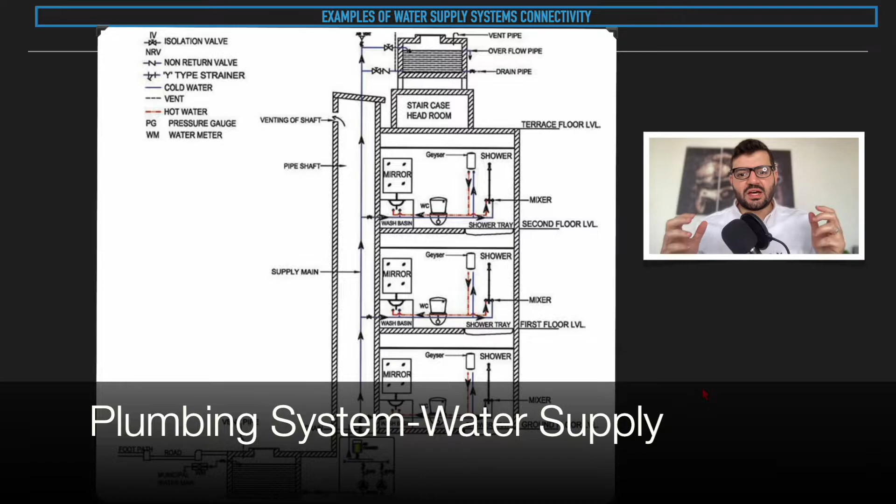Welcome back to another lecture. Now, this is where we get into the details, where we have the realistic application and the things that you can see in real life that will paint the picture for you based on what we have learned up to this current point. In front of us right now, we are going to have an example of a water supply system connectivity.

We do have a very basic structure, which is a two-story level house, let's say, or a small building, where we have the ground floor, then you have the first floor, then you have the second floor, and you have the terrace, and they go to the rooftop.

We're going to walk through the various components for water supply only, how the fixtures that we have seen within this current zone or locations are connected together based on what we have learned up to this current point, in terms of the connectivity, the components, how they have been assembled to deliver the required outcome, which is a functioning water supply system.

Now, let's start off with the space. Now, let's consider this current space right here, okay, which is typical to this space and this space. Normally, in real life projects, you do have typical spaces, which makes life easier for you as a designer, where you can get to design one space and just simply replicate that design for other spaces, especially if you have commercial buildings or residential buildings. If you have similar apartments, the layout is exactly the same. You can properly design and focus your design skills on one apartment, get everything right, and just simply replicate for the entire building, which is straightforward in that sense.

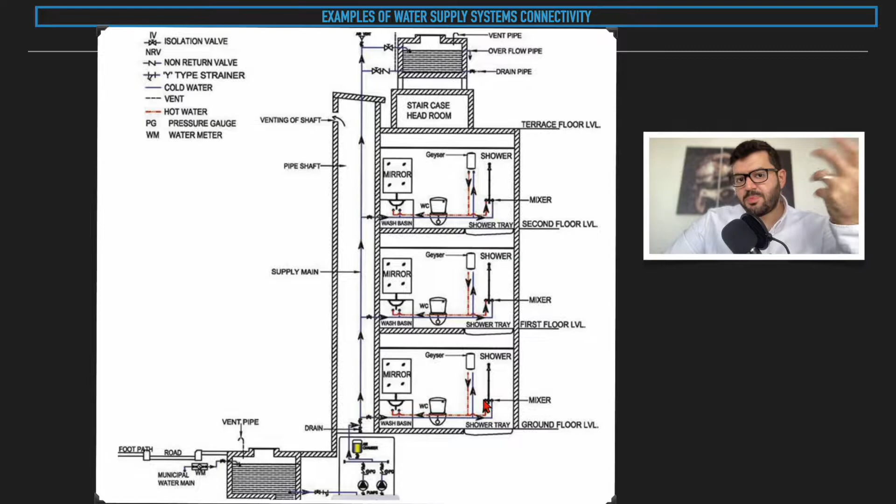Now, these PPR pipes are going to be cut down to certain lengths. Now we're going to be adding fittings, for example T connections. Let's say if we connect a pipe from this side and this side, then we have another pipe that way that will lead to the shower, that will lead to the water heater. We can add some flexible piping connections for the endpoints. This is a bit advanced, but for later time.

Now we combine the pipings with the fittings. How about adding some valves, right here? The first thing that came to mind is having a valve. Why? Because if I want to control the flow into the space completely, think about this space as one big pocket, and you're going to gush water inside that pocket. But you need to control that flow at any point in time, in case if you have a leak or something goes wrong, you need to maintain the fixtures.

You will close the valve. This is where we have a valve, and you can see on all floors this is a valve and another valve and another valve. It could be a globe valve, it could be a butterfly valve, but preferably for these basic applications you go for a globe valve, just to have a proper shut off for the entire space.

So we will have a valve which is going to control the flow going into the space, the water supply. Then this main line is going to feed this fixture with cold water, the WC, the water heater, and the shower. Then the water heater is going to feed the fixtures that need hot water with the hot water supply line. So you can see we have hot water, cold water, hot water, cold water.

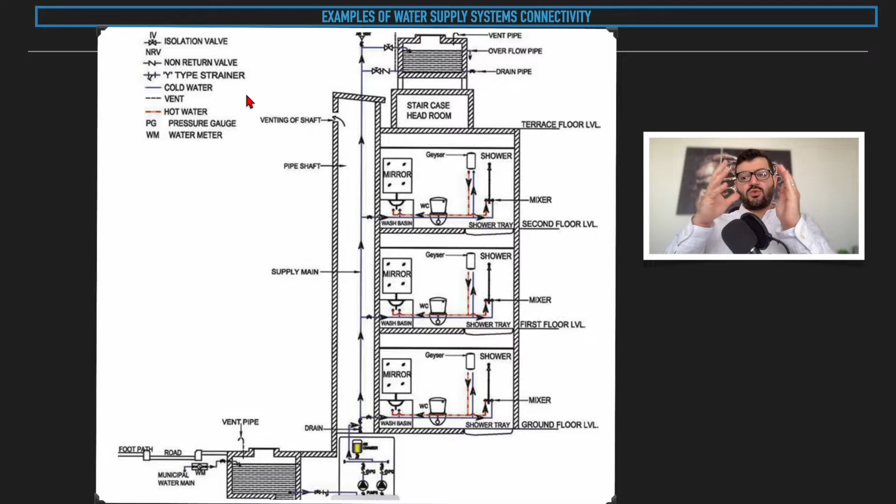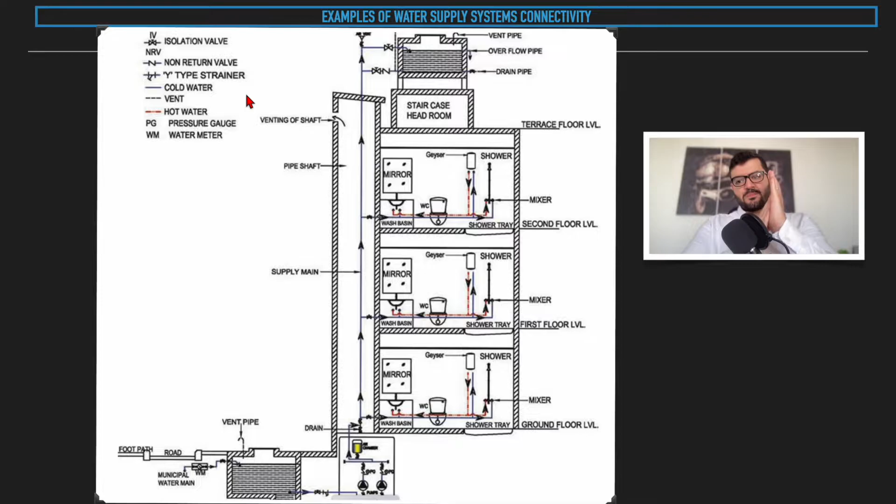When we need to connect a piece of equipment like a pump, we need to make sure there are no contaminations or solid pieces that might get inside the pump and break it. So what we do is use what we call a strainer, like a filter. We put it in the middle of the line as the flow goes in. If there's any solid part, like a piece of paper or a plastic bag, it doesn't pass through into the pump and break it. It gets stuck at the strainer. Then we can take the strainer out, simply clean it, and put it back into the piping network.

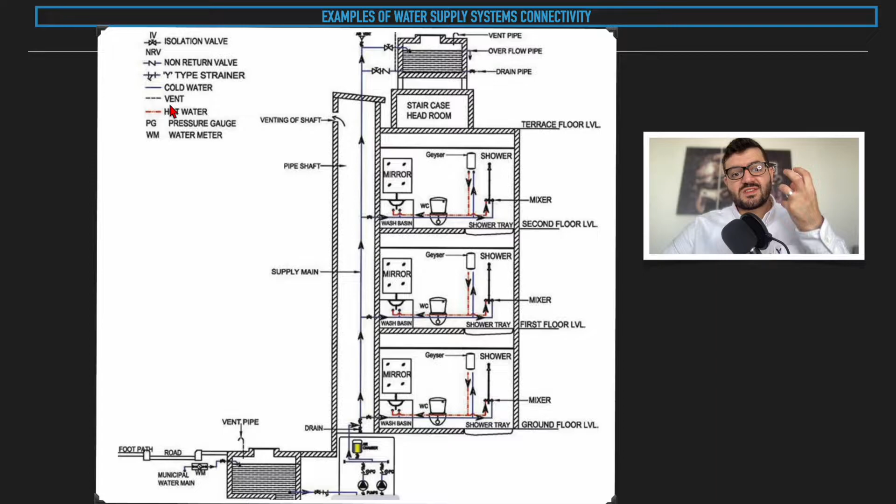Now, the blue line is for the cold water, and the dashed line is for the vent. I'm going to tell you what a vent is. A vent is simply for the discharge of air or odor into the surroundings, because the plumbing drainage system has smelly features, so you have to discharge that smell somewhere outdoors.

At the same time, you have to make sure the pressure inside the system is controlled. You don't want an overly pressurized or under pressurized system. Think about it this way: if you have a small bottle and keep adding fluid inside, the level will go up, and eventually the bottle will burst. The bottle in this case is the piping network. So what you do is have some vents such that once you add pressure, you're able to vent that pressure from your system.

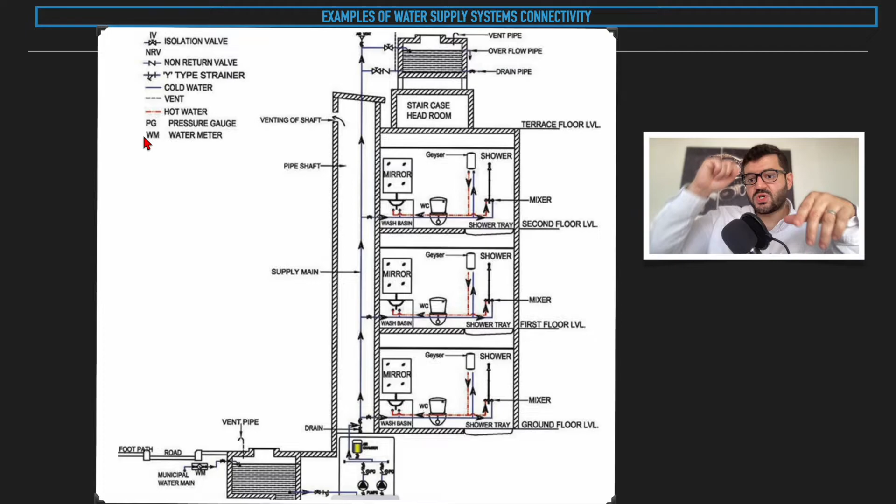Now the red line is going to be the hot water. PG, often you're going to see this, a pressure gauge. The same way you have a thermometer to measure temperature, we need to measure the pressure of the system. In the piping network, we have a pressure gauge, like a needle. You simply insert this needle inside the piping network and it shows you how many bars you have.

It's very useful for measuring the pressure before and after a pump. Once we select a pump based on certain requirements for pressure, head, and flow rate, I need to make sure my pump is delivering as per my expectations. So I'm going to get a pressure gauge and put it at the inlet and at the outlet of the pump to see the pressure difference.

Now, WM is water meter. If you're living in a country with a monitored watering system, this water meter calibrates how many gallons of water you've been consuming per month, and it's basically at the entrance of the facility or building. For example, right here, this is the municipality main water line from the government, and it goes into the water meter, which is going to be held. It shows you how much water has been contained in this current tank that will be used by the entire building.

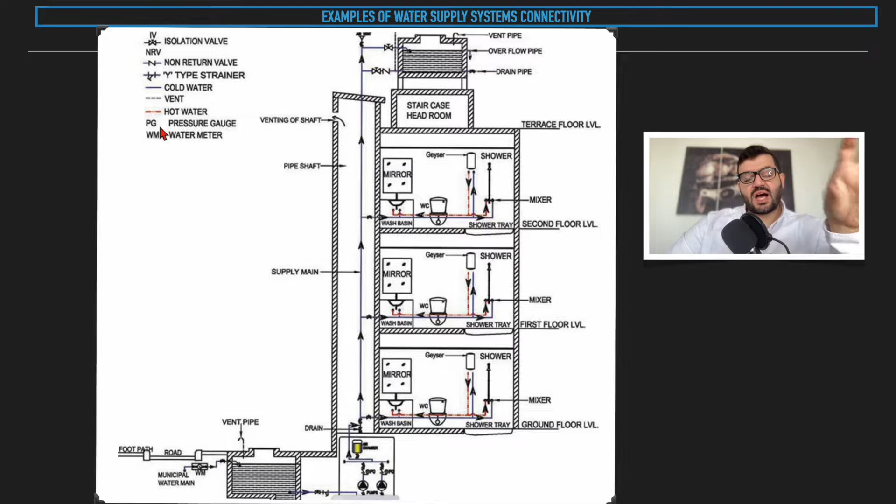So now you have a lot of information, so make sure you can simply pause and replay to have a better grasp of the concepts. That being said, the legend is very important because it shows you what you're looking at, what these components are, so you have an idea what every symbol means. So before attempting to deal with a drawing or a schematic, take a look at the legend, see what components you're looking at, and apply what you're seeing to the schematic you have.

Now let's get back to our sketch, to the drawing. We do have this current space. We said the blue line is the cold water, the red line is the hot water. We have the symbol for the isolation valve, one valve, two valves, right? If you take a look, for example, from this space to this space, they are typical to each other, so we have the same arrangement on all of these spaces.

Now let's go a step backwards. We are starting from zooming in, and now we're going to be zooming out in order to have the full understanding and comprehension of the system, how it's built. So we have this space, this space, this space — we have understood the setup for these spaces.

Now let's zoom back. We have one main line — this is the main line, main cold water supply line, as you can see over here, going up. In this line, on the right side, we take a branch, and another branch, and another branch. This is a typical practice where you have a main line and you simply bleed the line with branches to feed the space that you have. Obviously, this main line also has isolation valves to simply cut off the entire supply for the entire building.

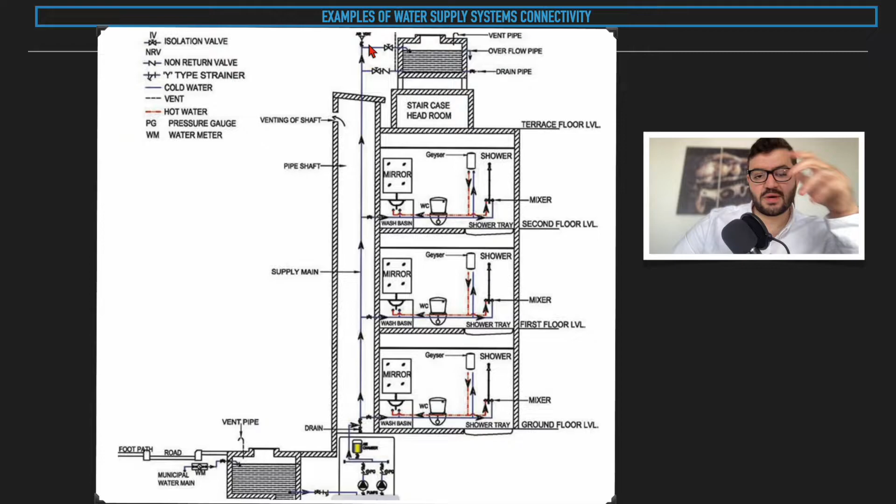Now, if you take a look at the top, this is an air vent. We keep it at the maximum height of the building above everything else, in case we have a pressurized system and something goes wrong — we have something to release the extra pressure of air into the surroundings so it doesn't break or burst my piping network. Now, this is the main line, right? As you can see, the main line started from somewhere right here. This main line has these connected to it — this is the footpath, and this is the road, the street, where cars are driving.

Now, underground, you have the water supply line from the municipality. You have a water meter. Next to the premises, you do have a tank, right? We said it could be an RCC tank if it's buried inside the ground, reinforced concrete. Take a look at that lecture for clarification.

Now, we have collected the required amount of water for this specific building. How do we get this amount of water? How do we calculate? How do we size it? This is a subject for another course. We're taking a look at the general buildup for plumbing systems, but how to design water supply tanks, how to design the pipe sizing, the sizing of the pumps, the drainage system sizing.

We're going to cover them in an array of courses and lectures because this is a whole discipline. It's not just simply a couple hours course and you can just simply cover the entire concept of plumbing. People spend years of their life learning about these things. So we do have the plumbing, the tank where you have the water.

Then we have the plumbing network or the piping network, which we have a main pipe connected to a valve. If you notice, this is the strainer we're talking about. It filters the water in case something is trapped inside the water before going into this. This is the typical symbol for a pump, literally a triangle with a circle around it. It shows you this is the pump, the arrangement for the pump.

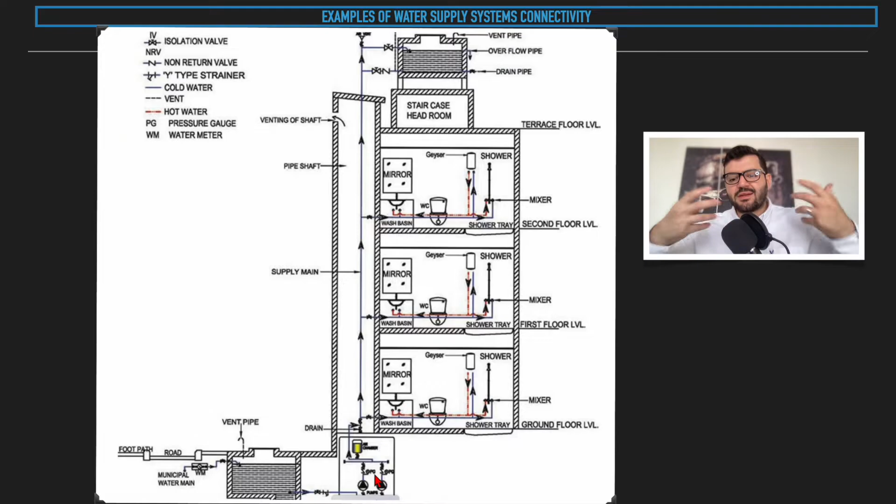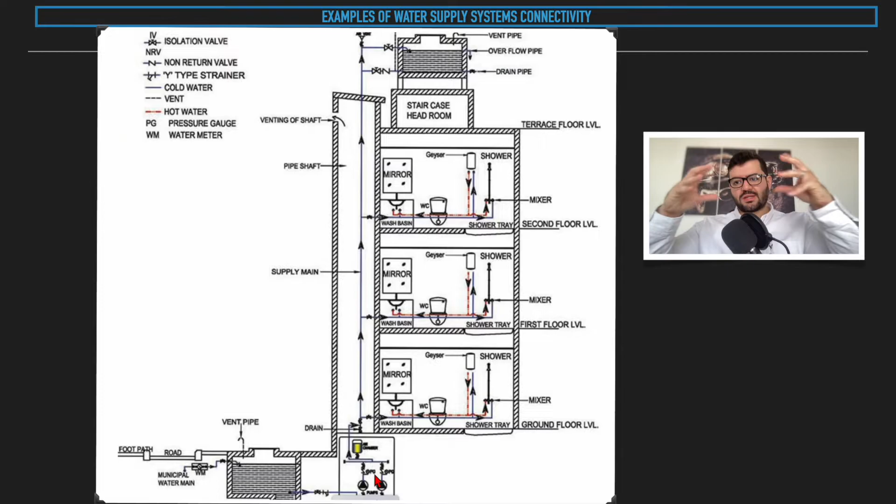Think about it this way. If you have a turbulent flow, it's going to obstruct the mechanism of the pump, simply put. It's going to reduce the lifespan of the pump. You have lots of wear and tear. Even your piping network, you have many leaks, you get noises from the pipelines. So all of these are avoided by properly collecting your water or the flow in a header, then releasing it into the spaces or the piping network that you have.

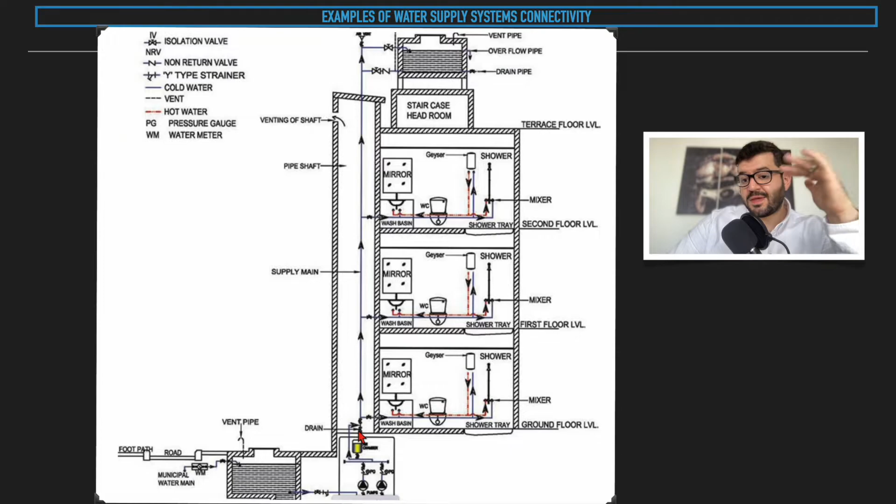That being said, we're going to collect the main header flow. Then it will go through, let's say, an air vent over here, just a pressurized tank, to make sure in case there are fluctuations of pressure, it doesn't affect the integrity of my piping network. Then we have the main line. This is a drain in case I need to flush my entire system. Shut off the valve and just open it, all the water will be just falling out, literally draining your system.

So we have the main line, we stored it in a tank, we gave it to a pump, as we have learned. The pumps are going to increase the pressure to pump it upwards for the entire building. We went through the main line, first branch into the space, second branch into the space, third branch into the space. Then we went all the way towards the top, then into this water tank at the top. This is the staircase headroom. Now, this is the main tank and this is the secondary tank.

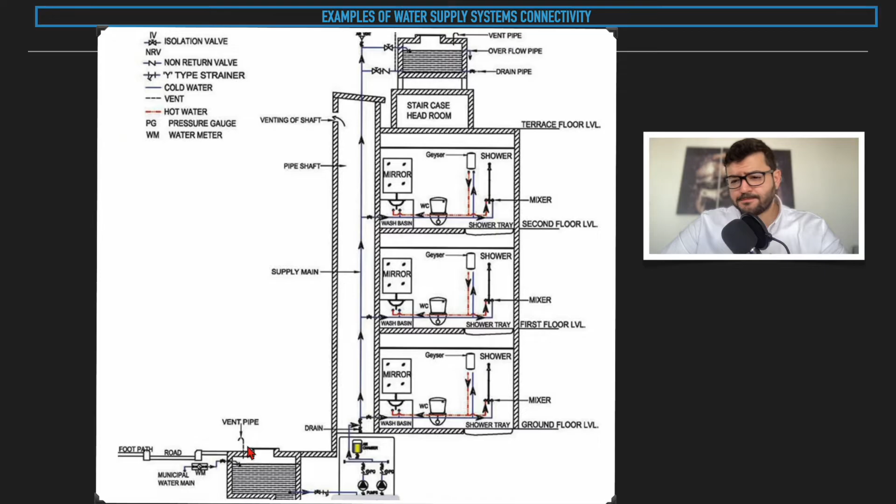Let's say this is where we pump in the water, right? It will go to this floor, this floor, this floor, and excess water is going to be going to this tank, which is going to hold the extra level of water. So if we have excess water being pumped, we're not just simply going to flood the spaces. Every single space will take its required gallons per minute. The excess is going to be going into this tank at the top, which is going to be filled, in case the tank on the bottom has been depleted, something goes wrong, or we need to do some maintenance over here.

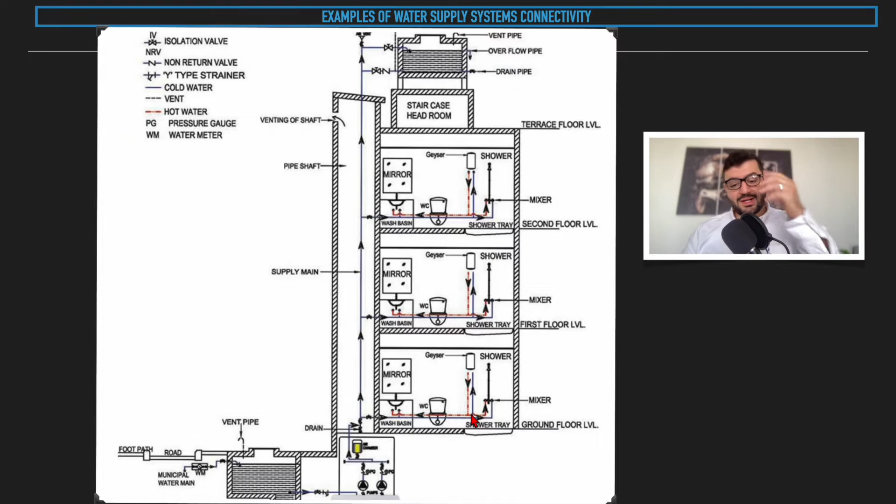This tank right now is going to be used to feed these spaces, where the arrow now is going to be reversed. We're going to have from the top all the way to the bottom, and it falls simply downwards. Then they'll have water this way, then water this way, water this way. This is a very smart design, and I personally like this design because it gives you that flexibility in terms of maintenance. You can pump the water upwards, feed the spaces, fill a tank.

That being said, I've worked on projects where you have towers, 48-story towers actually. They are overlooking the sea, and you have people living in those spaces, and you need to conduct maintenance works where you need to ensure that they are going about their day-to-day life with minimal interruption, which is more complicated than dealing with an empty space.

Now, this covers the entire schematic that we have. Let's go through the main points that we have covered. We said if you take a look at the typical water supply connectivity, for example, start off with the legend to know what are the components within this current connection. Now, we said we have these spaces, which are typical in this case. We have the wash basin or the sink, WC, water heater, shower, mirror. And we said the components which require hot and cold water. We have blue line for the cold water, red line for the hot water.

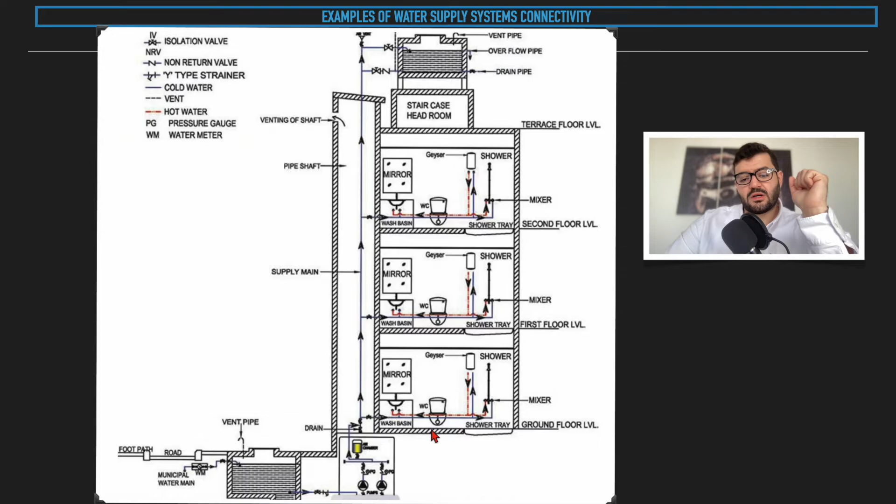Now, every single space, if it's typical, we're just simply going to replicate the design. Then we transition to knowing about the main supply line, which is controlled by branches, by valves as well on these branches to control the flow. Then we took a step backwards and we said this main line is being fed from the municipality water main, going into a water meter to just see how much water is being consumed. It goes into an underground RCC tank. Then from this tank, it's going to be pumped with the help of pumps to feed the entire building. And the excess water will be going to an overhead tank, which is at the top of the building.

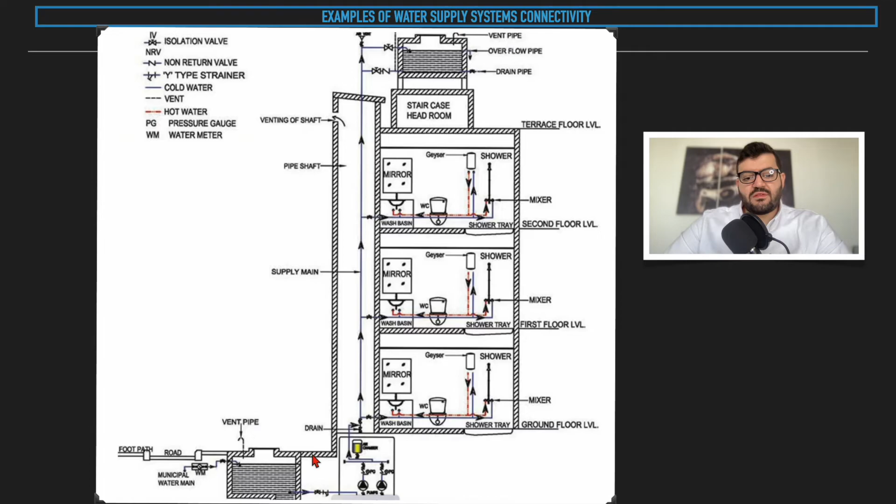Once we do have a lower water level here, this will be providing the excess support to refeed the entire spaces that you have. And we have seen the types of arrangements for the non-return valves, strainers, isolation valves, how they are helpful in shutting off the water supply on specific areas and components. This way you have developed a great awareness for water supply systems connectivity based on real-life applications, real-life projects, noting that the information in front of you is very, very rare, and the knowledge you're learning is highly specialized, and it requires some level of attention.

So make sure that you pause the lesson, replay the lesson, have a notebook next to you. You can just simply write down the notes, and if you do have any questions, feel free to share them, and we are more than glad to help you out.

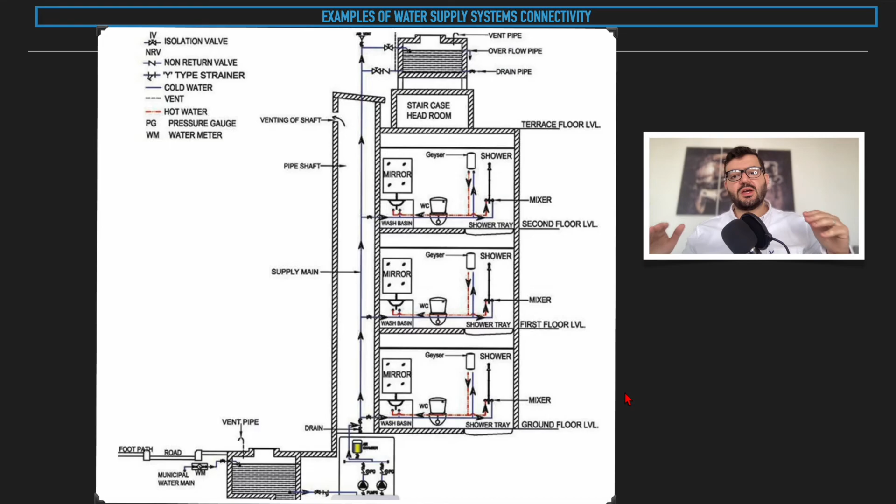Now, in the upcoming lectures, we are going to take a look at the drainage system connectivity. Then we're going to build up how to read engineering drawings, what are the best practices, such that you'll have the development from no basic knowledge of plumbing to literally being able to pick up a plumbing drawing and discuss such a drawing like a professional with years of experience. I truly hope that you found the lecture from the course quite helpful, and it added at least an incremental value to your knowledge base.